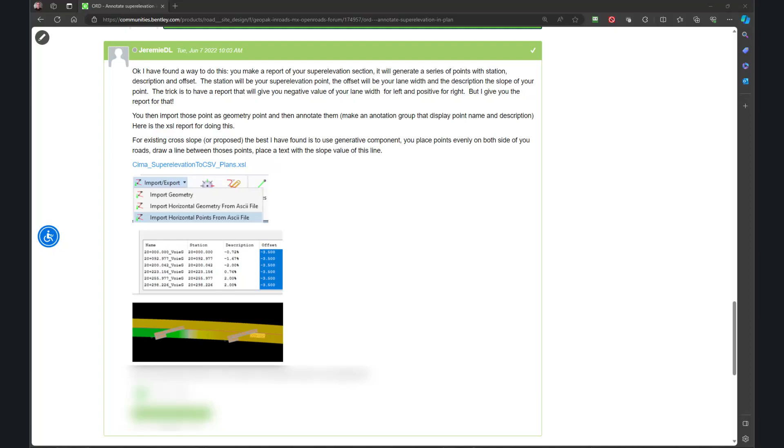In your delivery here, you're going to have a zip file with 3 files. You're going to have a template file, a DGN, a style sheet, and an XML file to use for your text import wizard.

Copy your style sheet over to where your reports are. I'm just using our delivered location, and I'll paste it into here. You'll see the folder path for Open Roads Designer 2023. I've already got the file in there, so I'll get a message asking if I want to replace it. I'm just going to skip because it's already there.

The other file you're going to get is a super elevation annotation template file. Let's make a copy of that and put it where you're going to be actually doing your annotation. We'll paste that in here and rename it, just leaving the name super elevation annotation.

We'll go ahead and open that file and take a look at what's in there. I've set up a bunch of stuff for you already just to make it work. You can tweak it to your own preferences. It has a couple of element templates in it - one to control the point that we're placing. It's just an active element point with a heavy line weight.

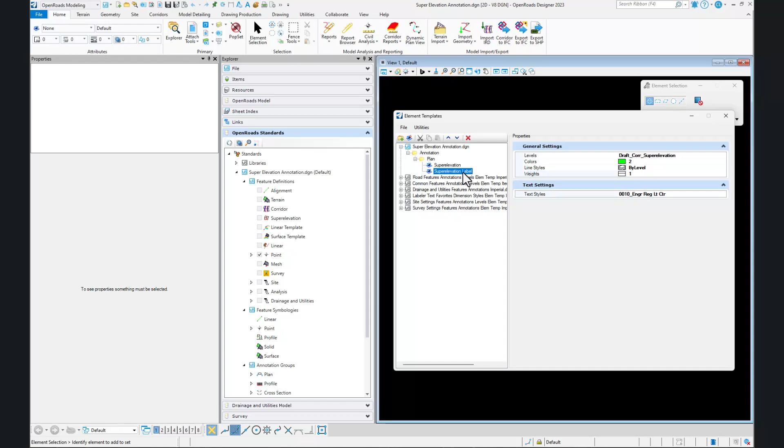And then another element template to control the super elevation label itself. It just gave it a different color, different line weight, and some text style.

I also created in here an annotation group for a plan point, just called super elevation anno. Looking at the properties there, for placing text I pointed to the element template. I turned on the leader, gave it an offset ending point and a circle size. I gave it a little bit of an angle and a vertical and horizontal offset, and picked a text favorite called super elevation anno, which is also in this file.

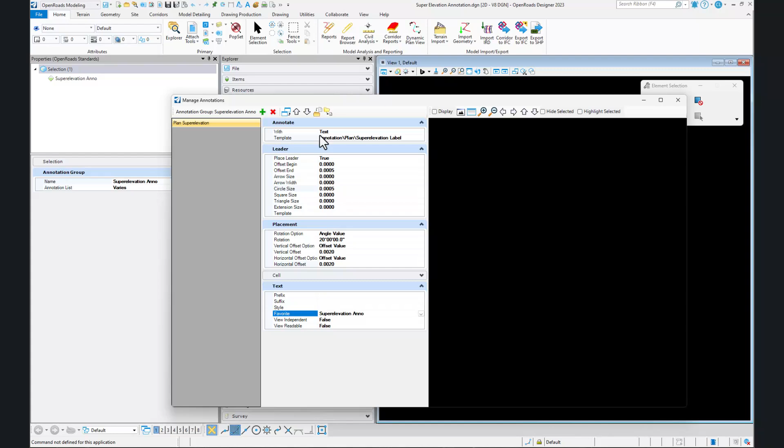So we take a look at our text favorite. It's the feature name and also the point description set up, and I put parentheses around the description. So that's our text favorite and our annotation.

I also created a point feature symbology, pointing to the element template that's in this file and also the annotation group that's in this file. Then lastly, I created a point feature definition and pointed to that symbology. The description and name seed won't get used here.

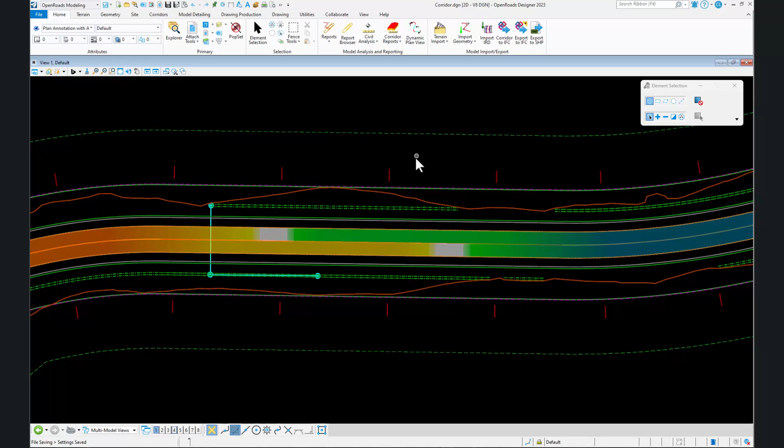So now I'm going to open up my corridor file, select my super elevation that's already been used in my project, and create a report.

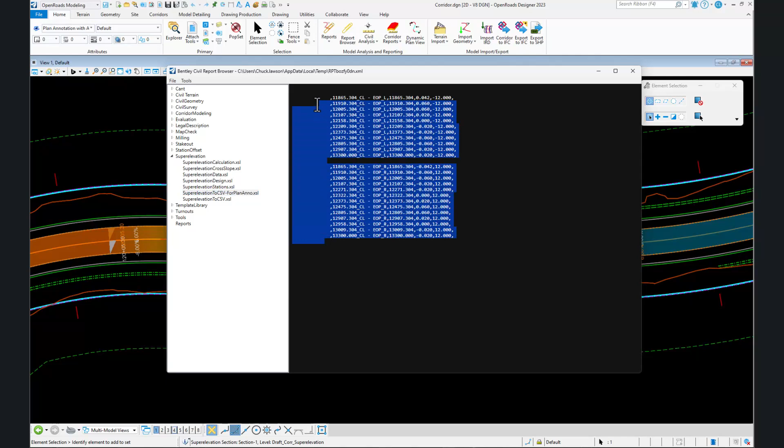I'm going to go to that style sheet that we've included on our reports folder. So I'll select it, using the left mouse button go ahead and drag and highlight everything, including the columns in the first row there that are empty. Right click, copy to your clipboard.

Open up a text editor. I'm using Ultra Edit - you could use Notepad++, probably could even use Notepad. Paste your information into there. You might want to go ahead and get rid of that bottom line, and if you want to delete your empty row, you can do that here.

You can do it later. But we want to save this, do a save as, and give it an extension CSV. So I'm just going to call this super.csv, because we're going to take this over to Excel. Save that - you're done with your editor.

Now we're going to go open that file with Excel. Just double click it - if you've got Excel installed, it'll open right up. Everything's separated. Go ahead and delete the empty column A, and if you want to delete the empty row 12, you can do that as well. Just select it, right click, delete.

We'll go ahead and change column C to a percent format. I'm just going to select the entire column, hit my percent button, and then set your decimal places. I'm going to change those to 2 for your cross slope.

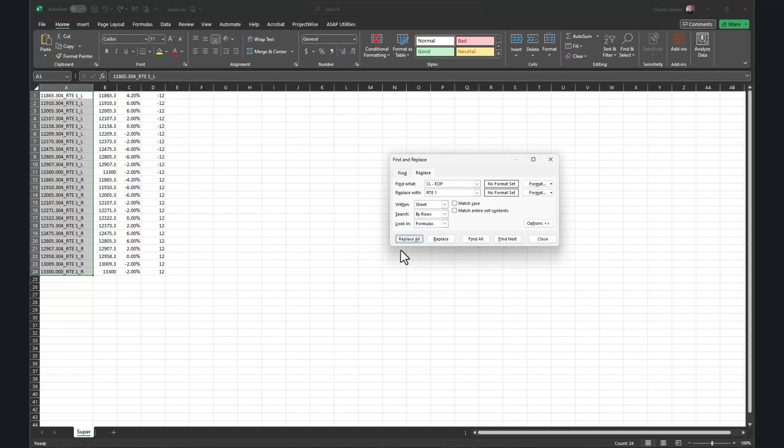Now if we want to put in an alignment name in here, just to show that, go ahead and select those, do a Control H for search and replace or find and replace. I'm going to search for CL space dash space EOP, and replace it with my route number. Again, this is just a suggestion. Then do a replace all. You have to leave the underscore L and R on the ends because if you don't, it's going to synchronize the names when we label. So don't take those out.

So close that. Go ahead and set our number of decimal places on our station column and also on our lane offset column or offset point column.

You might have a situation where you need to insert a row also. Let's say that you got to put it at every even cross slope. Maybe you need one, for example, at 5%. So if I go to row 2, right click and do an insert, and let's say that I'm going to need that at 5. So I'll put a 5 in there. That's also going to be a 12-foot offset.

But I need to compute my station, and I've came up with a formula that does that. So you'll see the formula in there that I'm using. Put that in, and then you need to right-click copy and then right-click paste values to get the formula out so that then you can use that on another row. So that's the second button there, second icon. And then just bring over column A and give it that same station value that the interpolation computed. So we'll grab the column A above it, paste it, and then edit that one and use that new station value in our title there.

Once you get all of your additional rows inserted, you want to save this off as a CSV file.

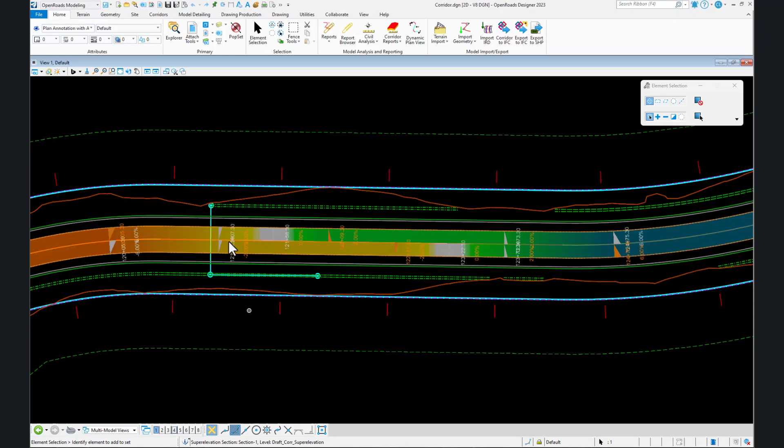We're going to go to our super elevation annotation file now. We just need to reference in our geometry. So we'll attach our geometry file. And then we're going to go to our geometry tab. We'll go to import our horizontal points from ASCII.

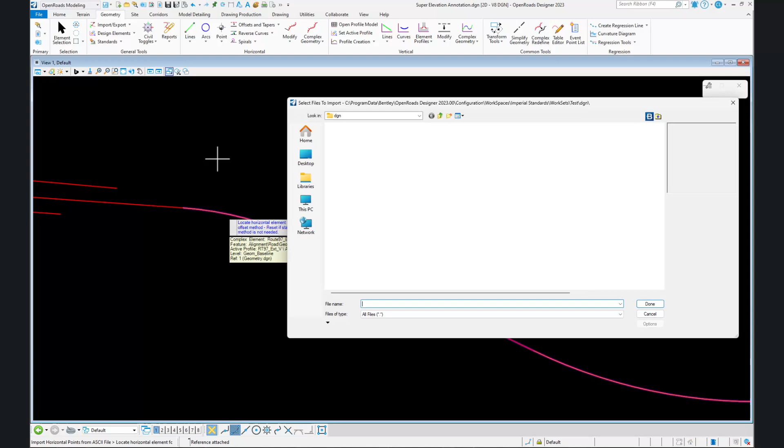Pick our alignment. These are based on. Pick our super import me CSV file that we prepared. Open that. Then you can go ahead and pick your wizard file or text import wizard file that formats, it knows what columns, what is what, and I provided that in here. So we'll go ahead and select that.

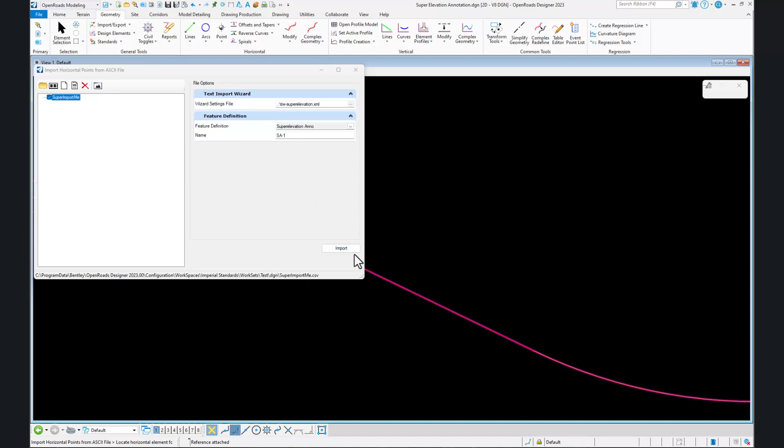Then you need to make sure to pick your feature definition. Don't forget that step. It will give it a name. Don't worry about that. It's not going to be used. So just import. That creates all your dots for annotation.

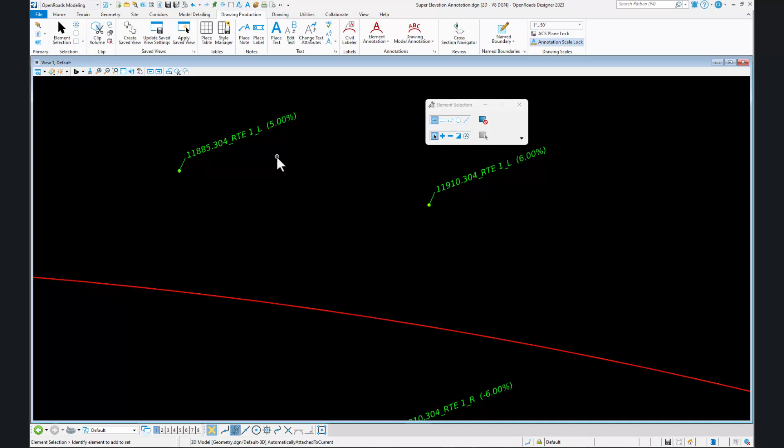And then you simply go to your drawing production, element annotation, and all in the model, and accept, and they're all annotated. Now, you can set up your annotation definitions however you want to. One line of text, 2 lines of text, rotated, perpendicular baseline. You could do a left and right annotation, however you want to do it. But this is just kind of giving you the general concepts and the general approach.

So hopefully you find this helpful. I know manually labeling these one at a time is pretty painful. So I hope that you find this beneficial. Thank you for your time.